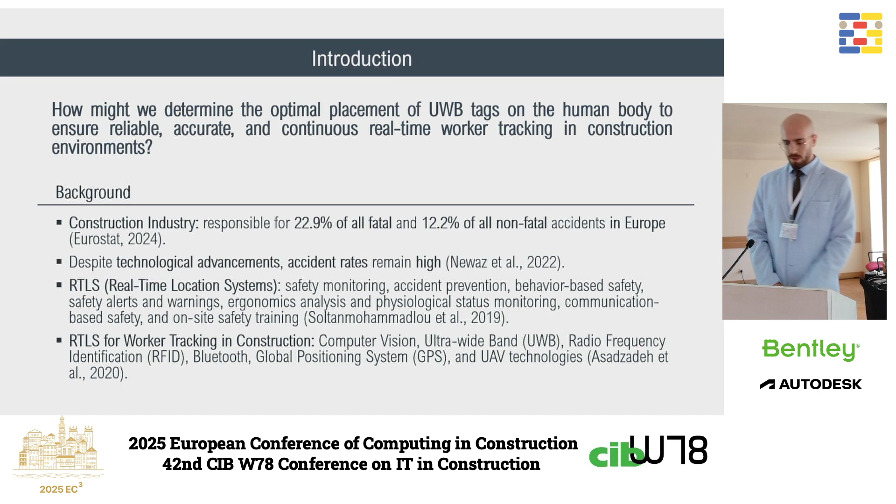When we check the background of this problem, we see that the construction industry is very hazardous, and despite technological advancements, there still remain some problems in terms of accident rates. Real-time location systems emerge as a viable solution to lower these rates. When we check the state of the art, we see that the technologies usually involve computer vision, GPS, RFID, and ultra-wideband. All of these technologies have their own unique benefits and disadvantages, and by having high-precision real-time data and being able to perform significantly well in complex indoor environments, ultra-wideband excels among the others.

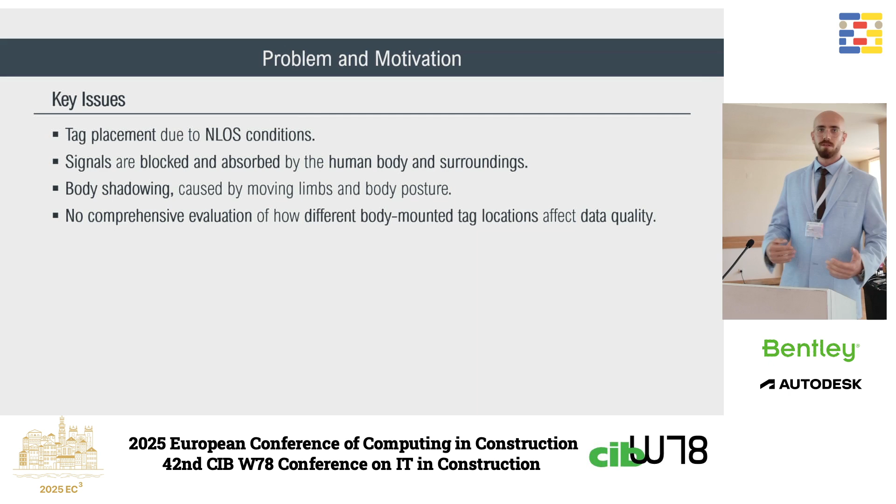But there are some key issues. The data quality and accuracy really depend on non-line-of-sight conditions, and tag placement is a critical factor here. Signals are blocked or absorbed by the human body or the surroundings. If you have a tag on your body and your body itself causes the signals to interfere, this is called body shadowing, and this is caused by moving limbs and body posture. And there has been no comprehensive study to test how different body tag locations affect the data quality.

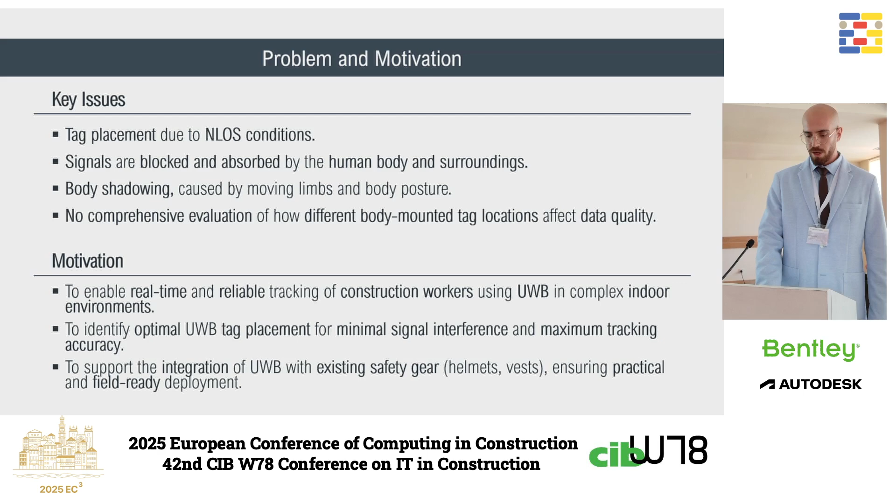Our motivation is to determine the optimal tag placement for minimal signal interference and maximum tracking accuracy, and to support the integration of this technology into existing safety gear. We carried out a controlled walking experiment using an ultra-wideband based real-time locating system. We developed our system using a commercially available kit, we had 6 participants in the experiments, and we placed 4 tag pairs on the bodies of these participants.

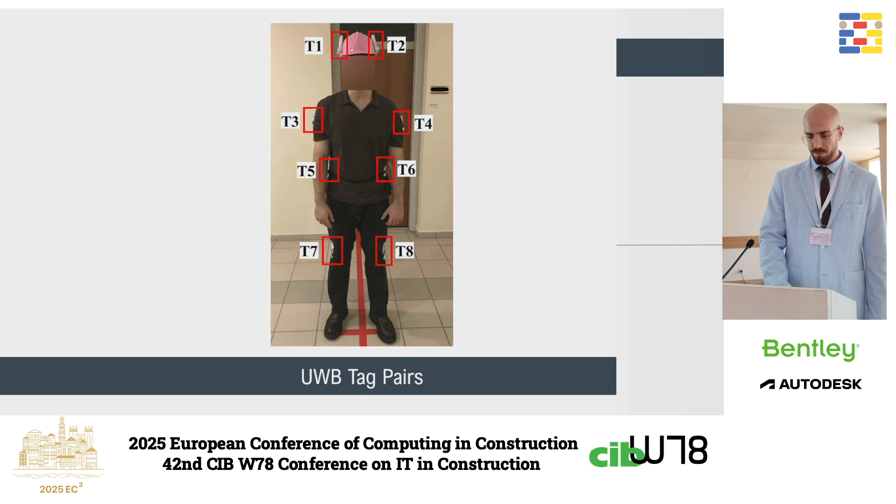In this figure you can see the locations of these tags. We selected these locations based on the availability of existing safety gear, such as helmets or safety vests. We had 2 experiment routes perpendicular to each other, and each participant completed 60 passes. We had a 4-anchor setup placed in an XY rectangle with different heights to improve trilateration accuracy. We collected the data at 10 Hz using a Raspberry Pi 5 serially connected to a listener tag, and we also recorded videos at 30 FPS for pre-processing.

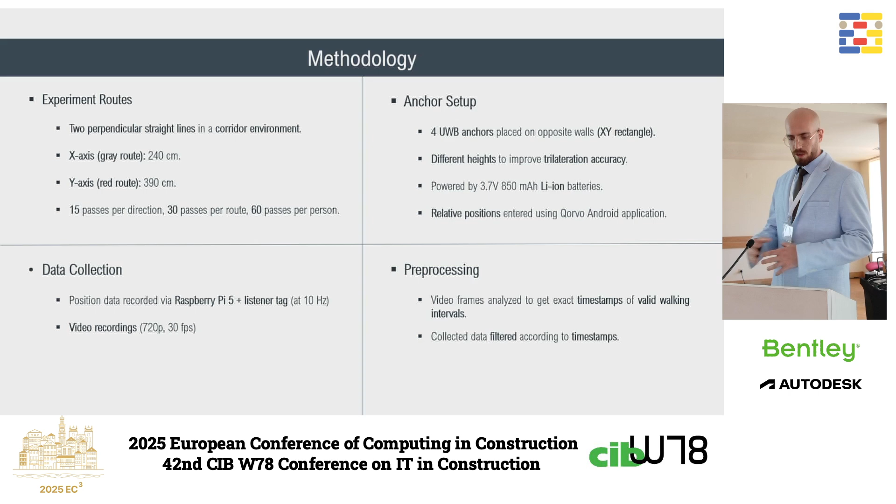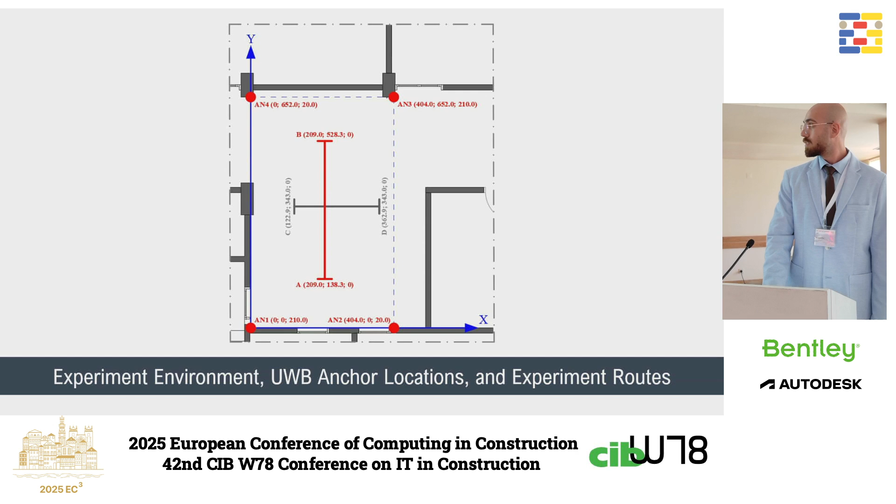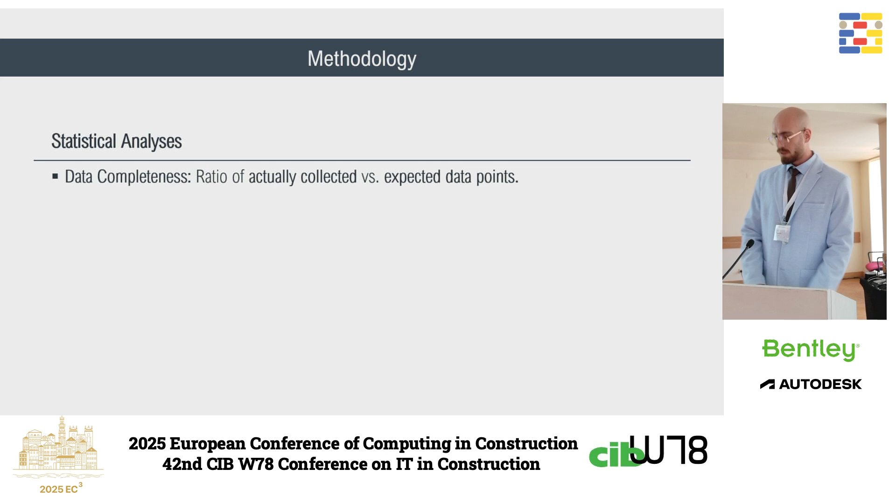We carried out some statistical analysis on the data collected. First we checked the data completeness. Then we compared the measured center locations with the theoretical center locations using a t-test, and we also compared the variances across the axes using an F-test to see the performance of this setup across the axes. Lastly, we calculated the mean absolute error and standard deviation values.

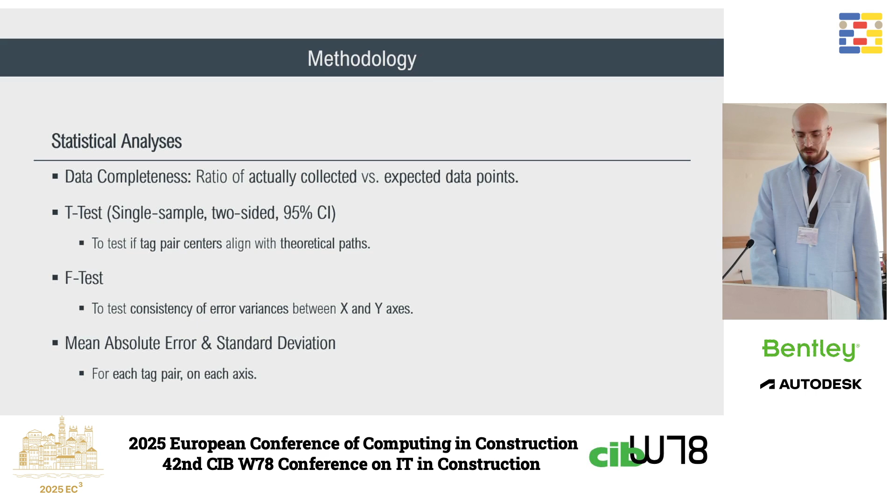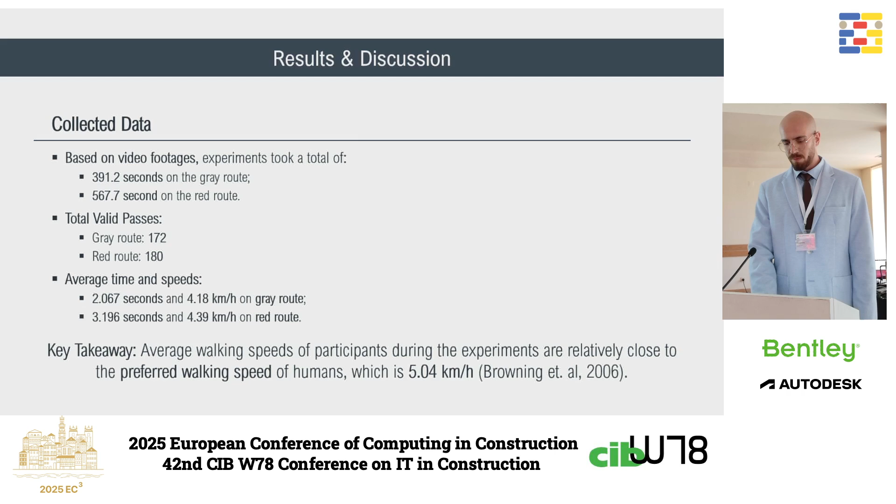Based on the video footages, we identified the number of valid passes and the duration of each pass. We also calculated the average walking speeds, and when we compared the speeds, the walking speed during the experiments was relatively close to the preferred walking speed of humans.

So based on the video footages, we expected to have some amount of data based on our data collection rate. And when we compare the actually collected data, we see that some tags, for example, the tags located at the head, have almost 100% data collection rate, but this rate changes for some other tags.

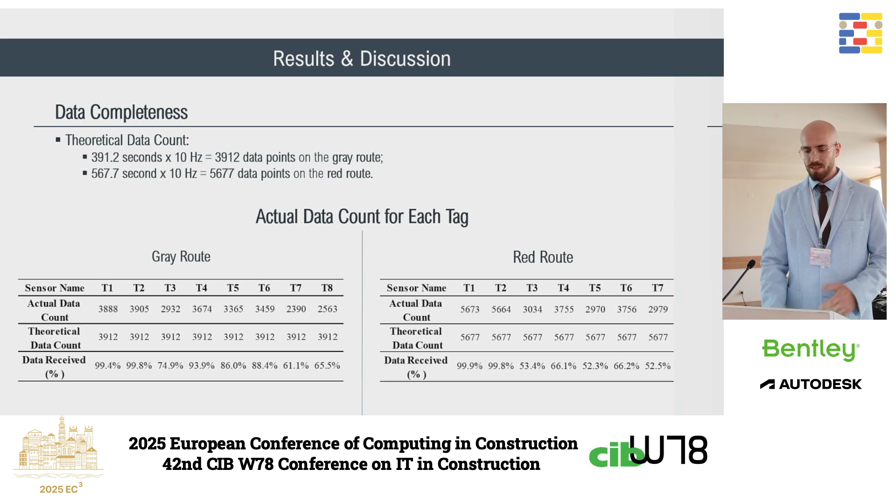So when we look at them as pairs, so when we check when both tags of the pair were able to collect the data, we saw that the head-mounted pair performed significantly better than the others. We had 99% data collection rate, but for example, the knee-mounted pair was only able to collect less than 30% of the time. So imagine the experiment took 100 seconds, so for 99 seconds the head-mounted pair was able to collect data, but this was almost 30 seconds for the knee pair.

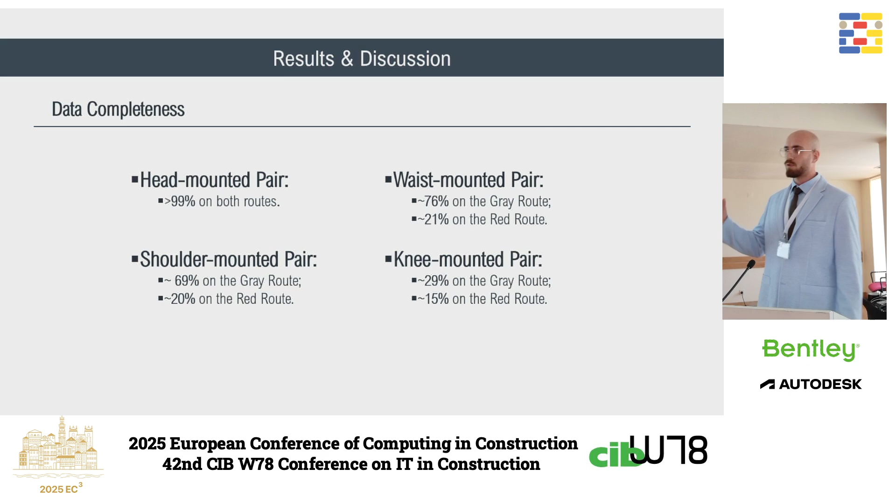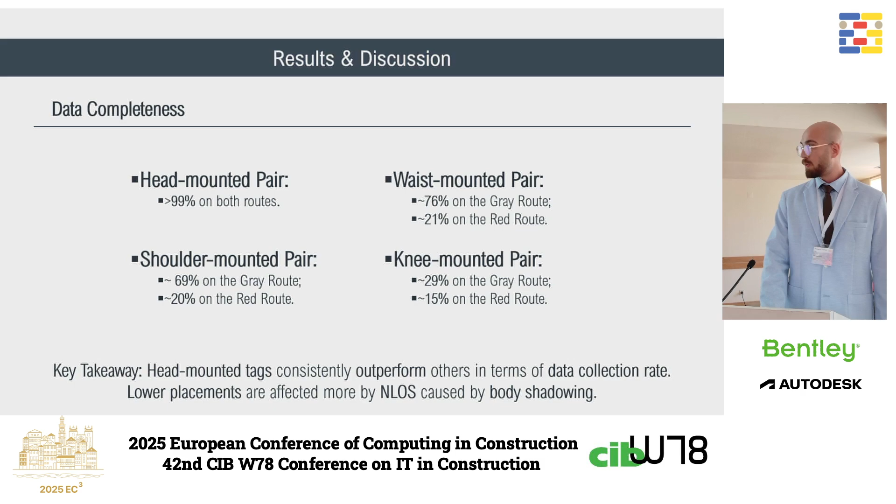And our key takeaway from this finding was that only the head-mounted pair has a very significant data collection rate, and the lower placements are significantly affected by non-line of sight conditions. So we also carried out some t-tests, and we've seen that only the head-mounted tag pairs show no significant difference from the theoretical path, but the others show significant difference, meaning that only the head-mounted tag pair accurately reflects the worker's walking trajectory. So these were the results for our t-test.

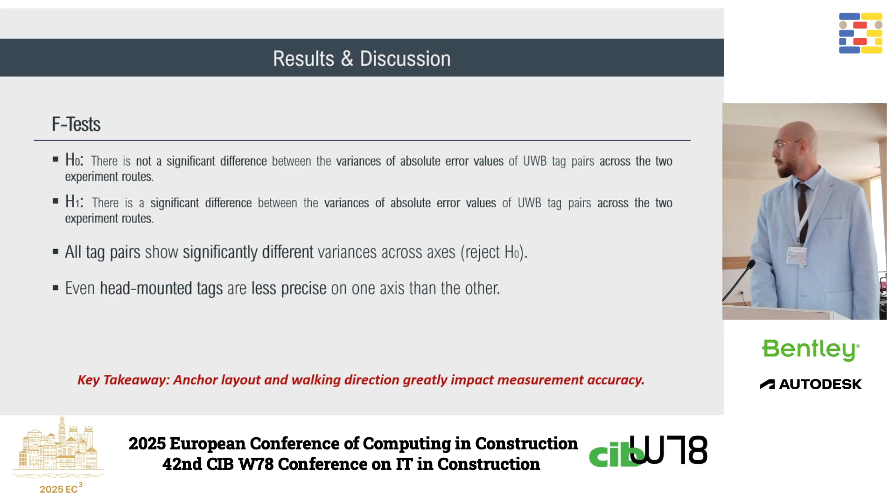So in the f-test, we compared the variances of absolute errors between the axes to see if the system performed well in both axes, but for all tag pairs there were significant differences of variance across the axes, meaning that the anchor layout and walking direction greatly impact the measurement accuracy. So this was the results for our f-test.

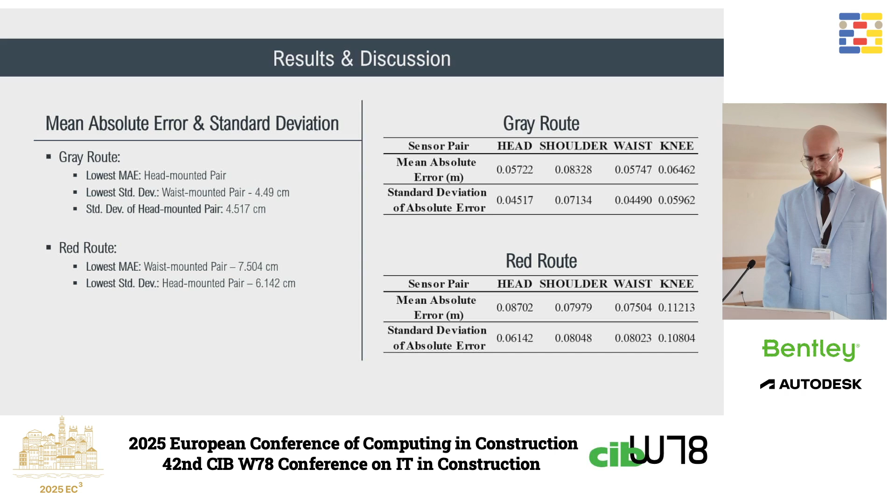And lastly, we calculate the mean absolute error and the standard deviation values. So the head-mounted pair resulted in the lowest mean absolute error and the second lowest standard deviation on the gray route. So we have 5.7 centimeters of absolute error and 4.5 centimeters of standard deviation. And the results are similar in the red route.

So when we compared our findings with previous research, we saw that the mean absolute errors are comparable to Dabove et al.'s study, where they used this technology to track construction machinery, but we experienced some higher standard deviations, which might be linked to the human walking factor. Also, we showed the impact of non-line of sight caused by the human body, and we also showed the potential of this technology in worker tracking, and also its sensitivity to anchor setup.

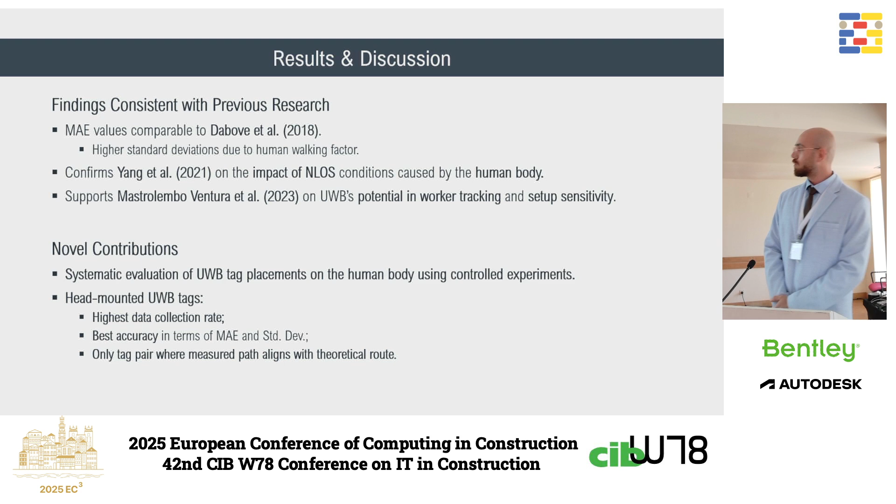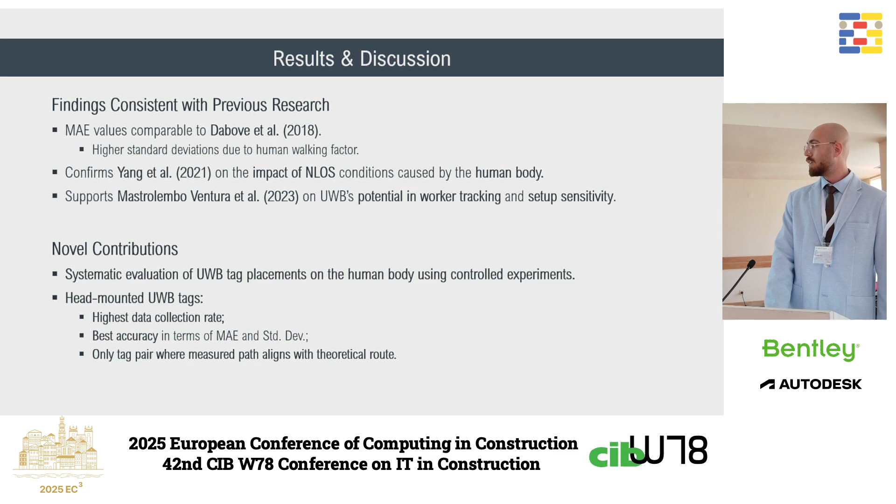So this was a systematic evaluation of ultra-wideband tag placements on the human body, and as far as I know, it's one of the first studies to ever do that, and we have shown that the head-mounted ultra-wideband tags perform significantly better than the others. So in short, this study can be seen as a practical reference for integrating this technology into construction safety workflows.

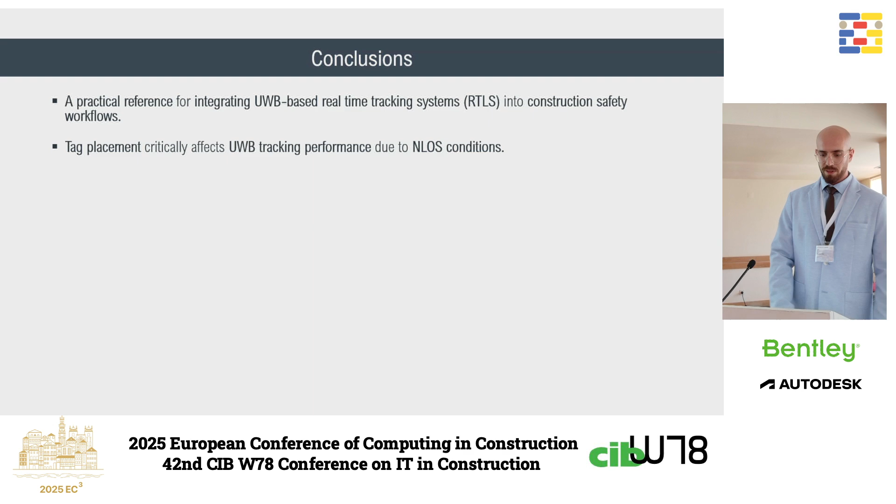And we have seen that tag placement critically affects the tracking performance. And we have shown that the head-mounted tag pairs seem like a viable option if the deployment of such a technology is considered. But anchor configuration still matters.

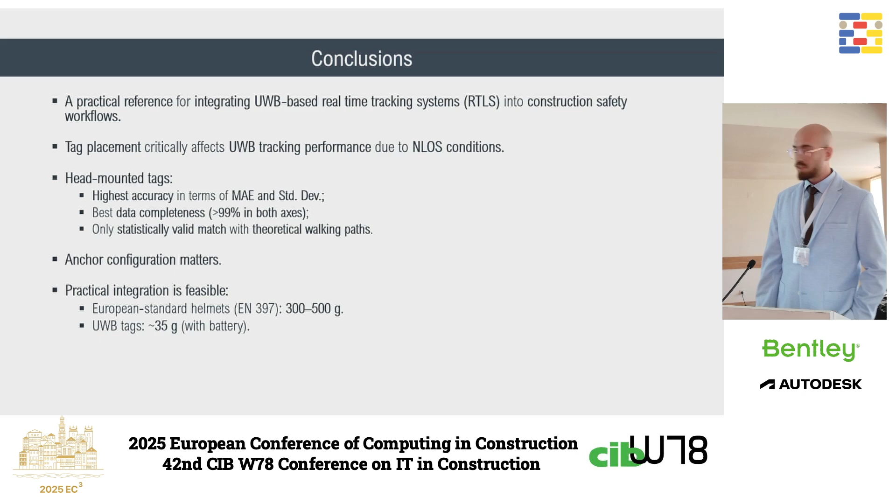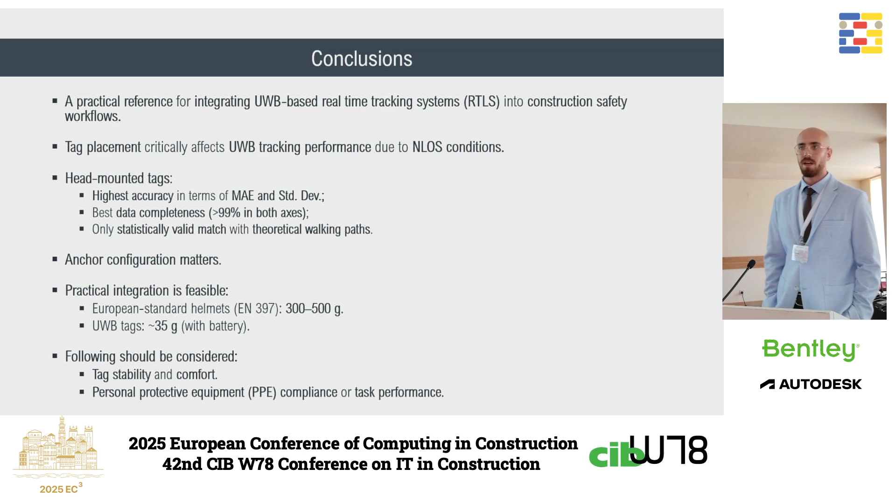So when we check the European standard for helmets, we see that the weight of each helmet is around 300 to 500 grams, and each ultra-wideband tag is 35 grams, including the battery. So a pair is 70 grams, and with inclusion of these sensors, the helmets are still in the given range, meaning that the practical integration is feasible. But tag stability, comfort, personal protective equipment compliance and the task performance of workers should be considered.

So our study has some limitations. We carried out our experiments in a controlled indoor setting, and we allowed only one participant to be present in the experiment. But in real life construction sites, we have multiple workers working in proximity. Also we have a limited sample size, and we were only able to check one anchor configuration.